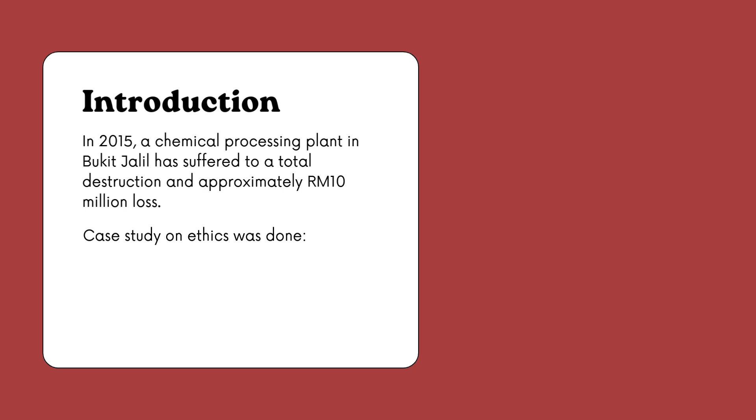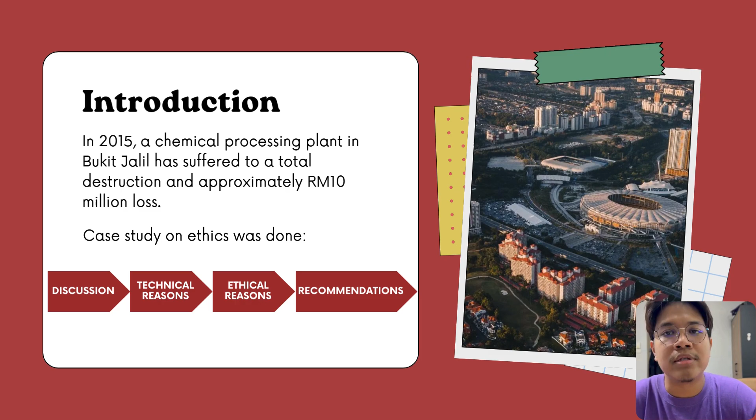In 2015, Bukit Jalil was shocked by the explosion of a chemical processing plant, resulting in a total destruction and loss estimated at 10 million ringgit. We, Group 4, have conducted an ethical case study on this incident to analyze the technical and ethical factors that contributed to this catastrophe. Our study also includes recommendations aimed at preventing similar incidents in the future.

Greetings everyone. Today I will discuss the explosion incident at Allchem Lubricant Sdn Bhd, which occurred on May 12, 2015 in Bandar Kinrara Industrial Park, Bukit Jalil, Malaysia. The factory specialized in producing lubricants, hydraulic oils and floor cleaning detergents. The incident happened at 11:47 a.m. when a short circuit ignited hexane vapors stored on the production floor. This led to an explosion that completely destroyed the factory and partially damaged a neighboring facility.

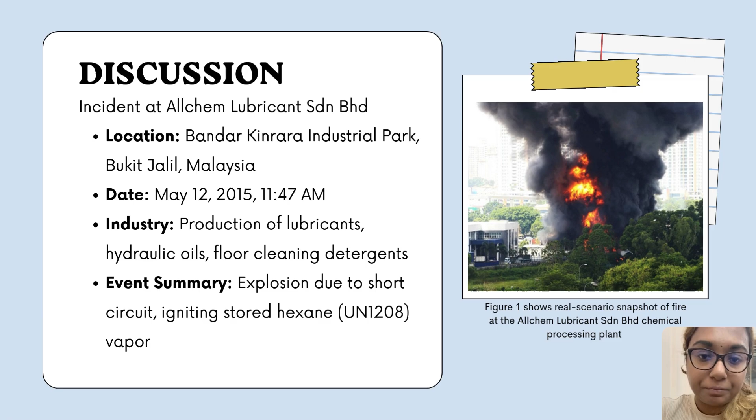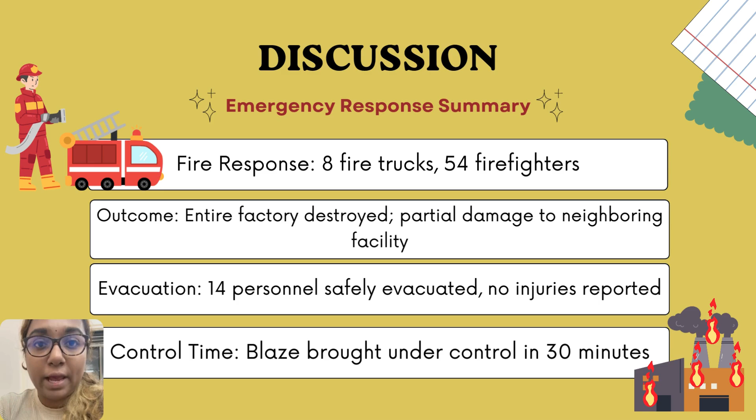As for the emergency response, fortunately all 14 personnel present were safely evacuated and no injuries were reported. The Selangor Fire and Rescue Department responded promptly, deploying 8 fire trucks and 54 firefighters, and the blaze was brought under control within 30 minutes.

Let's now examine the causes of this incident. There were 3 main contributing factors. Starting off with the ignition source, the fire started due to the short circuit near the hexane storage area. Sparks from worn wires ignited the hexane vapors, which then spread rapidly across the production floor. Secondly, the chemical properties of hexane itself. Hexane is highly flammable with a flash point of -22 degrees Celsius, meaning it can vaporize and ignite at room temperature. Stored on the production floor, the proximity of hexane to electrical systems significantly increased the risk of ignition.

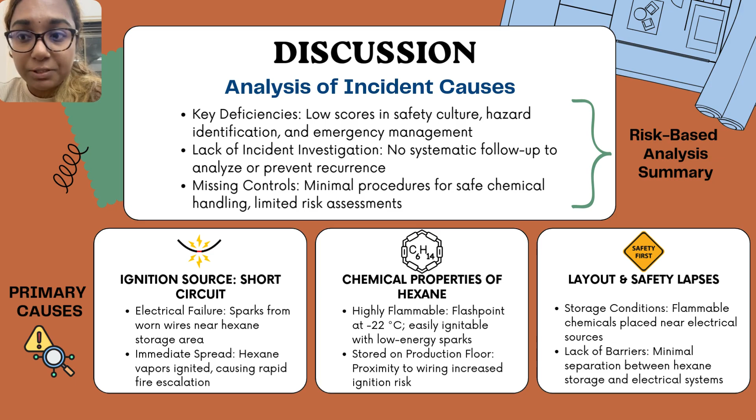And lastly, for the factory layout and safety lapses, the storage of flammable chemicals near active electrical sources without sufficient barriers or safety zones was a critical issue. This setup allowed the short circuit to directly affect the flammable materials. Finally, the risk-based analysis shows significant deficiencies, including poor safety culture, inadequate hazard identification, and lack of emergency management protocols. These factors, combined with insufficient post-incident investigation and control measures, highlight the weaknesses that contributed to this catastrophic event.

Hello, today I will discuss the explosion at the chemical factory in Bukit Jalil on May 12, 2015. This tragedy was caused by a combination of technical and operational failures. The immediate cause was a gas leak from a malfunctioning valve that released flammable vapors into the environment. Unfortunately, the vapor found an ignition source, a spark from nearby electrical equipment, which triggered the devastating explosion.

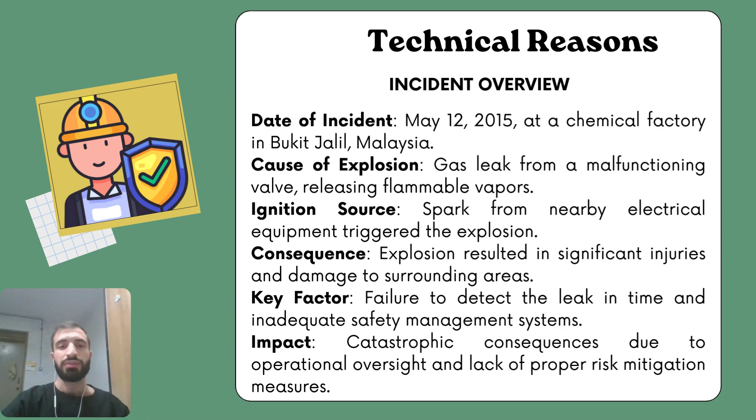Further investigation revealed that poor maintenance protocols played a significant role. Routine checks and inspections of the critical equipment were either insufficient or poorly documented. In industrial settings handling volatile chemicals, even a minor oversight can lead to catastrophic results. Tragically, the explosion caused significant injuries and substantial damage to the surrounding facilities, highlighting a failure in the facility's safety management system. This incident underscores the importance of strict safety protocols.

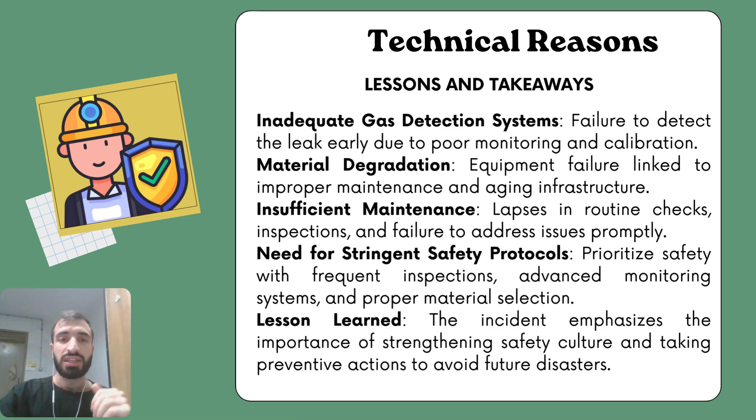One major issue was the lack of proper gas detection systems. Properly calibrated sensors might have detected the gas leak early, giving workers a chance to respond. Additionally, material degradation in equipment, possibly due to improper maintenance or suboptimal material selection, was a significant contributing factor. To prevent such disasters, we must ensure consistent inspection schedules, invest in durable materials, and maintain advanced safety systems like real-time gas monitoring. It's a serious reminder of the need to prioritize safety over operational pressures. Let this serve as a lesson to strengthen our industrial safety culture and prevent similar incidents happening in the future.

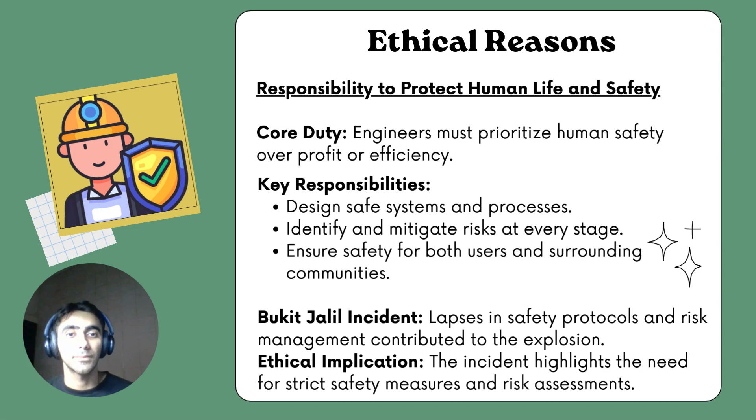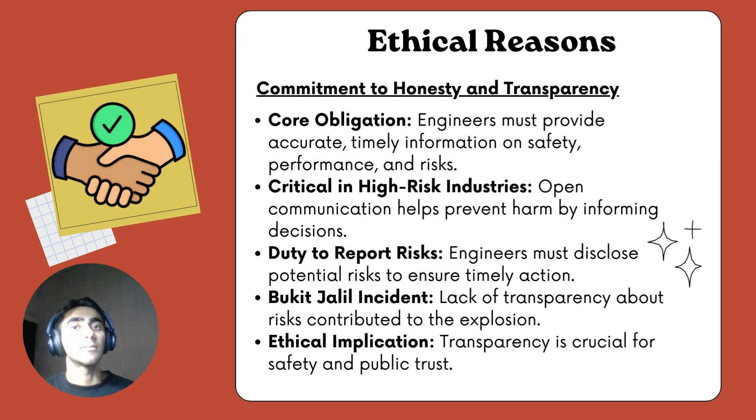Engineers also must provide accurate and timely information on safety, performance, and risks. In high risk industries, open communication is vital for preventing harm and informing decisions. Engineers have a duty to report potential risks to allow for timely action. The Bukit Jalil incident showed that the lack of transparency contributed to the explosion, highlighting the importance of transparency for safety and public trust.

Lastly, engineers must act with integrity, prioritizing safety and ethical standards. They should avoid shortcuts and deliver high-quality work, even under pressure. Engineers are accountable for their safety-related decisions and must take responsibility for their actions. The Bukit Jalil incident highlights how lack of accountability and oversight contributed to the explosion, emphasizing the need for engineers to own their decisions to ensure safety and trust.

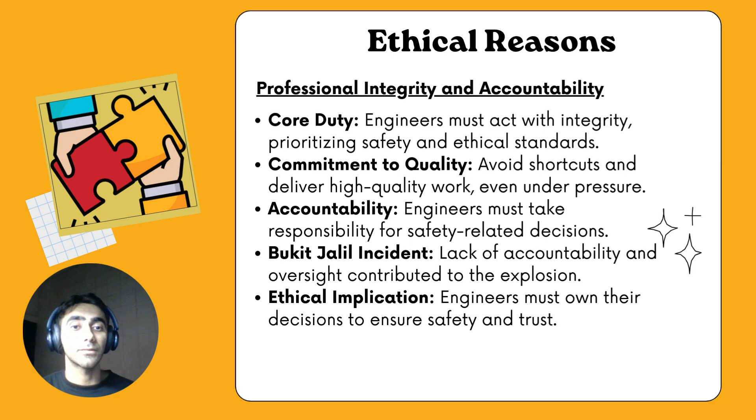Following the analysis of the explosion incident, it is essential to address the underlying causes and implement effective measures to prevent similar occurrences in the future. These recommendations are designed to create a safer working environment by mitigating risks associated with electrical hazards and flammable chemicals. The first one is the implementation of robust safety protocols.

It is suggested to conduct regular electrical inspections by establishing a rigorous schedule for inspecting electrical systems, especially near flammable materials. Utilize thermal imaging for fault detection. The second one is upgrade electrical infrastructure by replacing outdated wiring with flame-resistant materials to ensure compliance with industry standards. The third one is to install circuit protection devices, which is equip the facility with circuit breakers and ground fault circuit interrupters, GFCIs, to quickly disconnect power in case of faults.

The second recommendation is to do an enhanced training program. The first one is the mandatory safety training. It is recommended to implement comprehensive training on chemical safety, emergency response, and hazard recognition for all employees. Regular drills: conduct drills to familiarize staff with evacuation procedures and emergency protocols. The third one is to encourage employee involvement by fostering a safety culture by involving employees in safety committees and hazard identification initiatives.

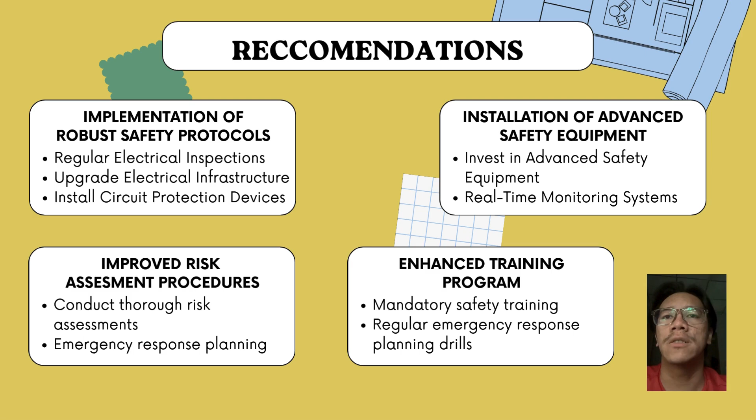The last recommendation is the installation of advanced safety equipment. We need to invest in advanced safety equipment by using explosion-proof fixtures, automatic fire suppression systems, and gas detection sensors for early hazard warnings. Second one is real-time monitoring technologies by implementing systems to track gas concentrations and temperature changes and provide alerts for abnormal conditions for workers on site. The last one is data collection analysis. Systematically collect data on safety incidents to identify trends and improve preventive measures.

To conclude the report, I'll be summarizing the three technical reasons, the ethical reasons, as well as improvements that can be done in the future. There were three technical reasons for the explosion at the chemical factory in Bukit Jalil. The first being the lack of essential safety measures. The second is the limited implementation of regular maintenance checks, resulting in unsafe conditions in the factory. The final reason is the factory's lack of emergency response training.

On the other hand, there are also ethical reasons on why the explosion of the Bukit Jalil chemical factory occurred. The first ethical reason is the responsibility of engineers to protect human life and safety, as their decisions directly impact the well-being of individuals and communities. The second ethical reason is the commitment to honesty and transparency. Lack of transparency in reporting potential risks played a significant role in the tragic outcome of the chemical factory. The final ethical reason is professional integrity and accountability. Failure to uphold accountability led to the tragic outcome and became a lesson in the ethical imperative for engineers and organizations to take full responsibility for their actions, or in this context, failures.

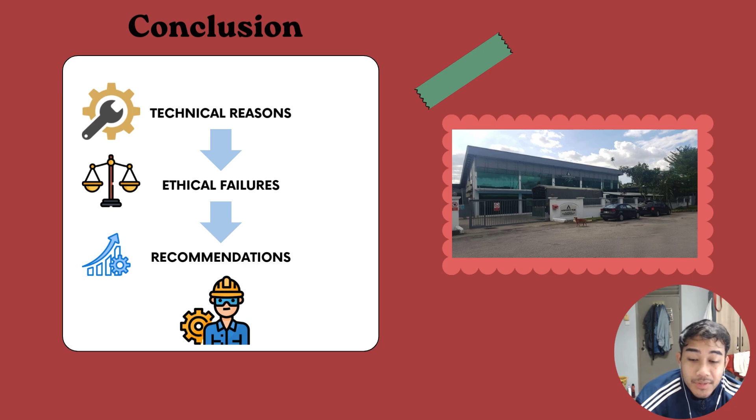To avoid tragic events from happening in the future, improvements must be made to create a safer working environment and a better quality of life all around. The first recommendation is the implementation of robust safety protocols. Enhanced training programs should be conducted as well as improved risk assessment procedures. Next, safety equipment should be installed to improve on the previous generation to avoid accidents due to faulty, dated equipment. Finally, strengthening regulatory compliance and community engagement. The recommendations are based on the tragedy in the report above, and if done in the future, can save lives and prevent tragic accidents like the Bukit Jalil explosion from happening again.